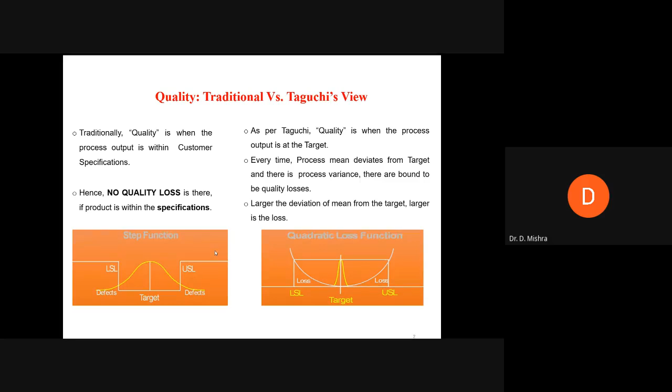Now, according to Taguchi, there is an ideal quality, and that refers to a reference point or a target value for determining the quality level of a product or service. That is the target level, as you have seen in the previous one.

And the ideal quality is delivered if a product or a service performs its intended function throughout its projected life under

reasonable conditions. So we can say this is working within that particular range and for the limit of the period that we have defined.

And this ideal quality is a function of customer perceptions and satisfaction. You know, this perception and satisfaction are both qualitative terms, and these qualitative terms have to be converted

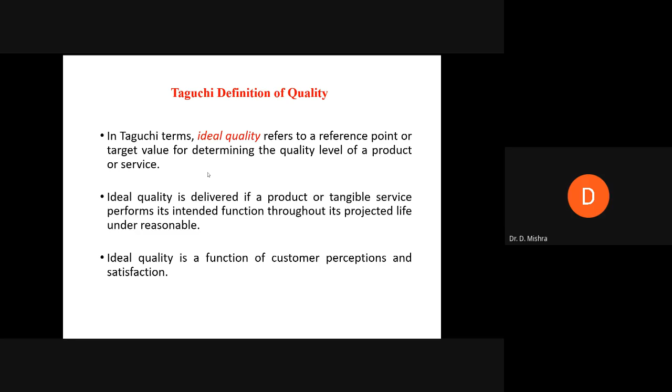to some quantitative term so that you can go for optimization of the parameters. You have to convert it to some quantitative terms. How this is converted, we will see.

Now, as you have understood, quality according to Taguchi is meeting the target, and in any process, in any manufacturing system, either it is a service or a product, there are some inputs, and when this

In any system, there are some noise factors, there are some process issues, there are some mismanagement, maybe human error, maybe the error of the system, maybe error of the workstation. So there is some noise.

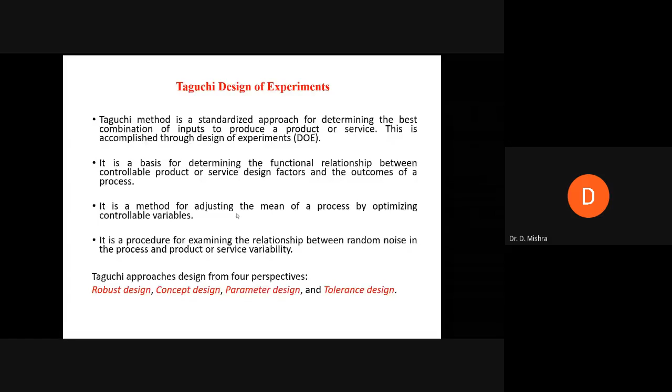This is the approach of the Taguchi design of experiment.

Now, what is the robust design? Robust design means you have to make it defect-free and high quality. And this Taguchi approach for creating robust design is through a three-step method consisting of concept design, parameter design, and tolerance design.

What is the concept design? This is the process of examining the competing technology to produce the desired output. So in the concept stage, you have to go for different concepts, different alternatives, study the alternatives, and ultimately converge on one alternative or one method or one technology so that it can be applied.

That is the concept, and this concept design includes the process technology choices and process design choices - whether the process will be automatic, semi-automatic, or automated, semi-automated, and in the design, whether designing of the layout, design of all other things, human behavior, everything comes under the process and design choices.

So this is the concept design. In one sentence, I can say this is the conceptualization of the product and process, and the design of the product and the process. That is the first one, the concept design.

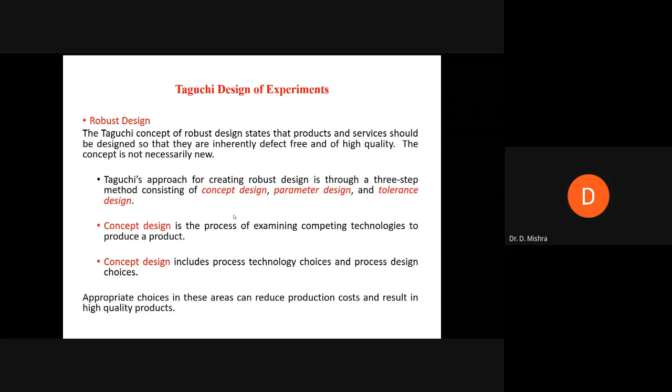Then parameter design - this refers to the selection of the control factors and either the level or the range of each factor that is to be controlled. Basically these are the input parameters which are required to be controlled. And these control factors are those variables in a process that...

Management can manipulate - the input parameters which the management can manipulate, not the user, the management that can manipulate. And control factors do not affect production cost. Cost does not depend upon this. When you say production cost, it is basically the raw material cost and all other costs related to the process.

In terms of time of production, the time of production is converted to cost unit and you find out the cost. So these input parameters do not affect the production cost. The optimal levels are the targets or the measurement of our performance - what is our desired performance, or what are the performance outputs that we require? That is to be defined in the parameter design.

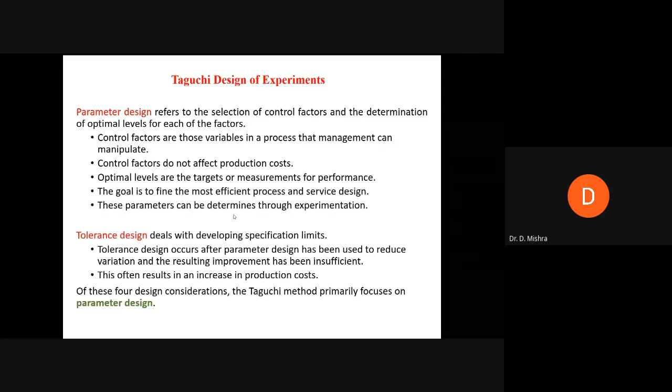So out of these four considerations, the Taguchi method mainly focuses on parameter design. Hence, here also we will study how we can design the parameter with the design of experiment using the philosophy of Taguchi.

Now, when can this Taguchi philosophy or methodology be applied? When you have a large number of factors, you can use the Taguchi methodology, and the time and cost of experimentation has to be reduced. Suppose there are so many factors, and for each individual factor you go for so many experiments, the cost of experimentation will be very high. Hence you have to reduce the number of experiments, and to do that, you adopt the Taguchi philosophy.

And in cases where the number of control factors is more than the number of noise factors, this is applicable because there is a better chance of finding a factor which will help in reducing the noise. And when the product and process under design is extremely critical, and in no condition shall the process deviate from the target, there you have to apply this Taguchi method.

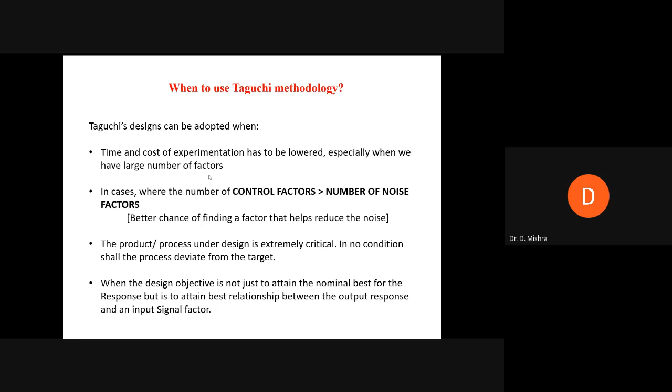And when the design objective is not just to attain the nominal best for the response, but to attain the best relationship between output response and the input signal factor, there you adopt this Taguchi methodology. But most importantly, what is required is that the Taguchi method is applied generally because the main objective, practically, is that we wish to reduce the number of experiments. We need not conduct the complete experiment; the number of experiments is reduced in this case.

And it defines a function called the quality loss function. Now we can look at this diagram. At the middle, this is called a step function, where a target is defined, and here there is an upper specification limit and a lower specification limit.

Suppose one observation, point A, is closer to the upper specification limit without being at the target. This is not at the target, rather it is at some other point nearer to the upper specification limit. What do you understand from this? We understand that this is within control, and this is a good part or a good product or a good process. But still, as this is not meeting the target, it is incurring some loss.

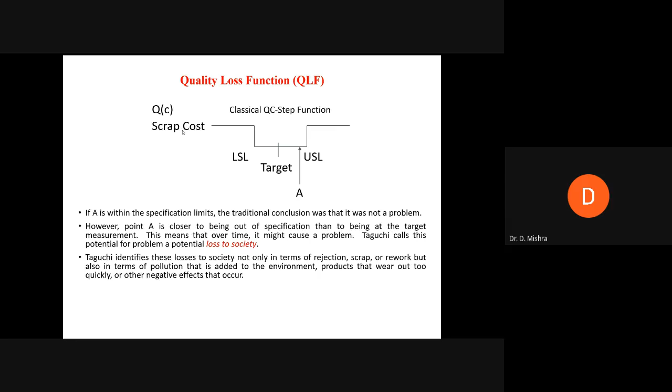That is a potential loss to the society. According to Taguchi, this is the potential loss to the society, because it is not achieving the target, not achieving the exact point. There is still some error, although it is within the control limit. Taguchi identifies these losses to society not only in terms of rejection, scrap or rework, but also in terms of pollution added to the environment, products that wear out too quickly, or other negative effects that occur. For rejection, scrap, rework, or pollution, product wear and tear, all of this costs a lot. Those are the losses, those are the noises. Those are the losses to the society or to the system, and if you can reduce these, it means you are reducing the noise.

The quality loss function focuses on economic and societal penalties incurred as a result of purchasing a non-conforming product. Although this is conforming, if you go for a non-conforming product, you incur a loss. These losses may include maintenance cost, failure cost, ill effects to the environment such as pollution, and excessive cost of operating the product.

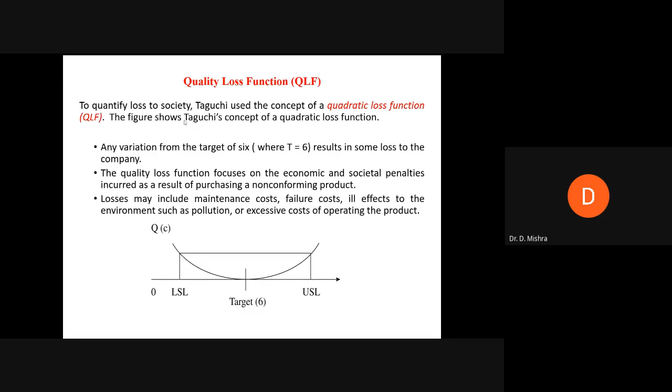This quadratic loss function is defined as: loss y is equal to k into (y minus m) squared. The k is a constant, dependent by A divided by d squared. A is the cost of corrective action, and d is the value of the process deviation. This is the constant k.

This is empirically related. Y minus m: y is the measurement of the unit, and m is the target value - how it deviates from the target value. When this is squared, it becomes positive, giving a quadratic equation, or second degree equation. This is defined as the loss function.

What is the objective of the loss function? The function drives the objective of Taguchi design, which is to design a process that not only complies with customer satisfaction, but is also aligned to the target. According to Taguchi, we are not only achieving customer satisfaction, but also achieving the target, or it is aligned with the target.

Now, based on this philosophy, let's see how this can be applied to a system. There are different signals, and we are getting noise. There is a ratio called the signal to noise ratio. This is a logarithmic function which can also be defined as an inverse of variance.

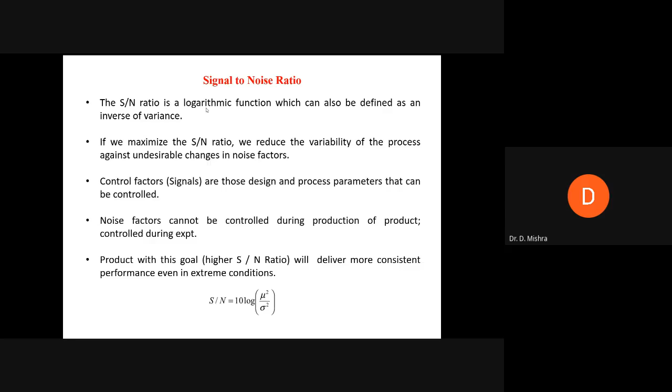So a product with the goal of higher SN ratio will deliver more consistent performance in extreme conditions. So we use the signal to noise ratio. The ultimate aim is to reduce the noise, and hence the signal to noise ratio - the higher value will yield better performance in terms of the output. That should be our ultimate aim.

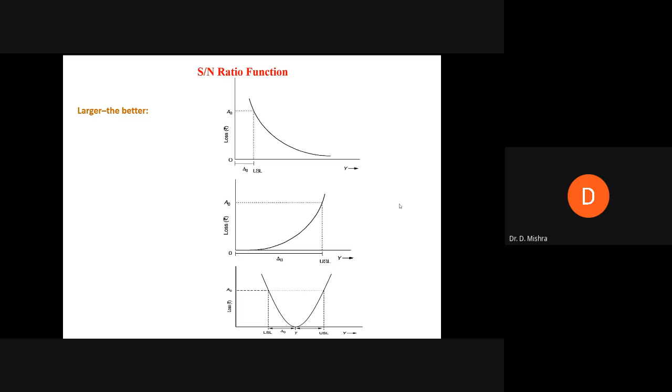You can see there are different functions defined. Generally, three functions are used. The first one is larger the better - for example, you need fuel efficiency, strength, tensile strength, compressive strength, adhesive strength, corrosion resistance. These are required to be higher. So in this case, we define a lower specification limit. Within or below that, these are rejected, and we accept other things above the lower specification limit. This is called the philosophy of larger the better.

This is the equation given by larger the better. Another one is the smaller the better - for example, the wear of an automobile tire, pollution, smaller the better. Defective, smaller the better. Shrinkage, radiation - this is smaller the better. So we go for the smaller the better, and this is the equation of this smaller the better.

You can study the graph. This is the inverse of the first one.

Now, nominal the best — actually, we have to achieve the target within these control limits. This is the basic equation for nominal the best. But while going for this, we have different control factors or input parameters.

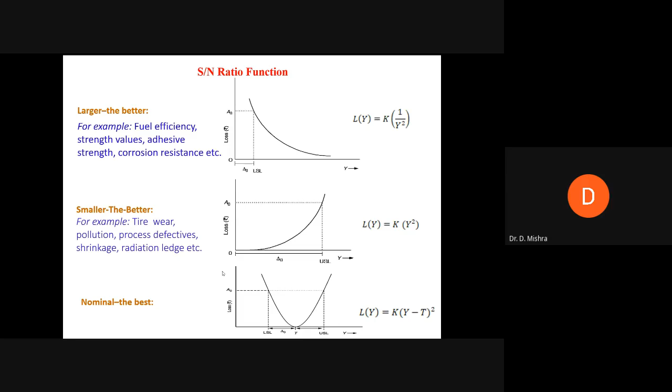Let us suppose for a machining problem, MRR required is high, but the surface requirement is low. So in one case we follow larger is better, that is for MRR, and for surface roughness we need smaller is better. These are the different functions we use while optimizing the process.

Now how do we choose this? Smaller the better minimizes the responses. Larger the better maximizes the response. Nominal the best targets the response, and you base the signal to noise ratio on means and standard deviations, directly achieving the target. So when there is a minimization issue, refer to smaller the better, and when you need to maximize, go for larger the better.

Now, what are the advantages of choosing this? The response varies related to the nominal or target value under different noise conditions, not the control conditions. The validation and prediction of optimum performance signal to noise results are transformed into a logarithmic scale, meaning if there is some non-linearity, this can make the behavior linear. This is the main advantage of using this signal to noise ratio.

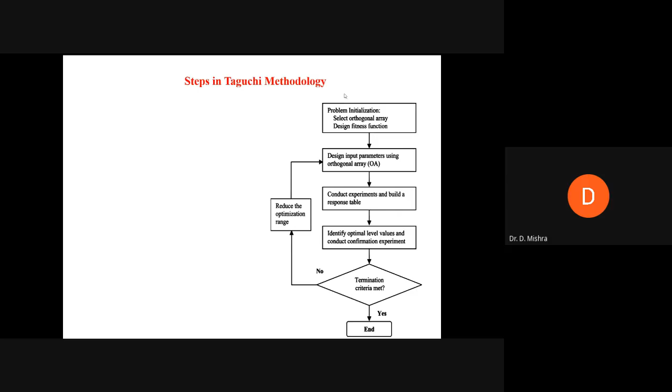Now, different steps of the Taguchi method or methodology, how to optimize the issue. This is the 8-step method. In this 8-step method, the first step is to identify the main function, its effects, side effects, and different failure modes.

Identify the noise factors, testing conditions, and quality characteristic. Identify the objective. Identify the control factors and their levels, the input parameters and their levels. Select a suitable orthogonal array, which we'll see, and construct the matrix.

Now, if you define it in a flowchart: initialize the problem with selection of different parameters, orthogonal array, and the fitness function. Then design the input parameters using the orthogonal array. Conduct the experiment and make a response table. Identify the level of values and conduct confirmation test. Check the termination criteria — if met, stop, otherwise you can redesign, go for optimization, or redesign the orthogonal arrays.

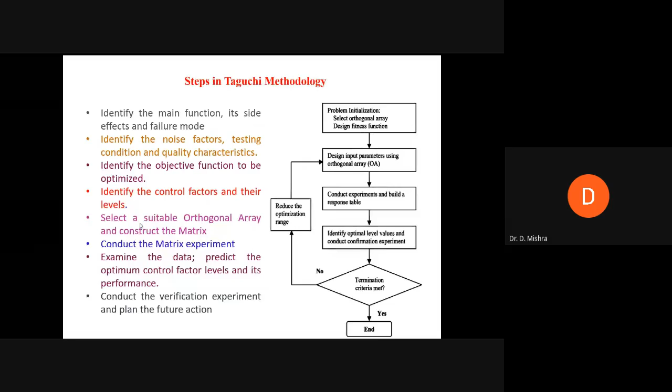Now let us take one example where it is an electrochemical machining process, ECM process. The side effects are material removal rate, surface finish, surface roughness, and radius overcut or ROC. And it lists down all the factors that will affect or influence the machining process.

There are two ways — this is very important. You have to identify or find out what you are going to do, what should be the input parameters, what should be the range or levels of those input parameters, and what are the objectives to be optimized.

You can do this in two ways. One, by a brainstorming session, where you take different ideas and knowledge from various literature, from experienced or skilled operators, and from previous experimentation data. Based on this, you have this session, and if this happens, you have to go for a lot of brainstorming sessions with other people also.

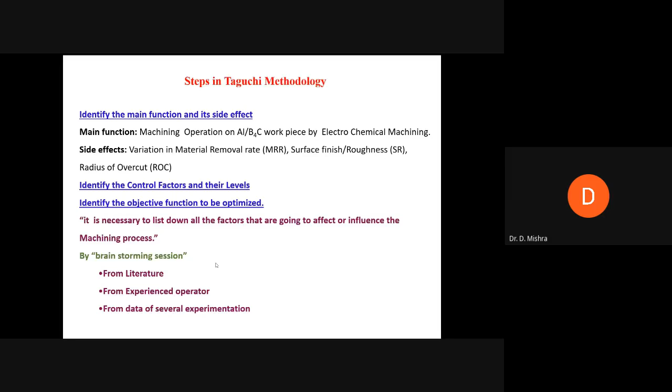You can discuss this and find out what are the objectives and what are the control factors or input parameters. Or you can go through a fishbone diagram.

Out of these many things, you have to study which factor or parameter is affecting most, and also from this you can find out the noise factors which are not under control except during experiments in the laboratories. So either from a brainstorming session, which is a qualitative method, or from the fishbone diagram, which is also qualitative, you can find out the control parameters or input parameters and the response or desired performance required. This you have to find out from these two.

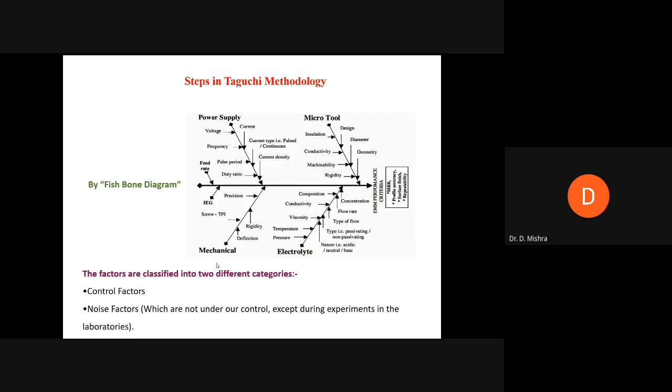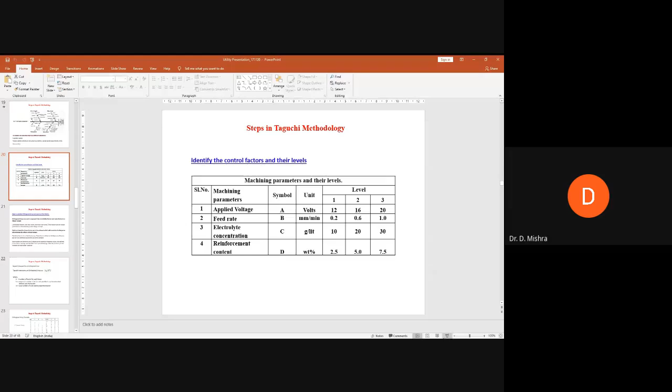So here, for this electrochemical machining, I've taken voltage, feed rate, concentration of the electrolyte, and reinforcement content - A, B, C, D. These are four input parameters, and we have defined the range.

We define the range from 1 to 3, or 3 levels. Voltage is varying from 12 volts to 20 volts, feed rate is from 0.2 to 1, and electrolyte concentration from 10 to 30. Like that, we define the level or range, and within that range we define 3 levels: level 1, level 2, level 3. These are the input parameter settings we define here.

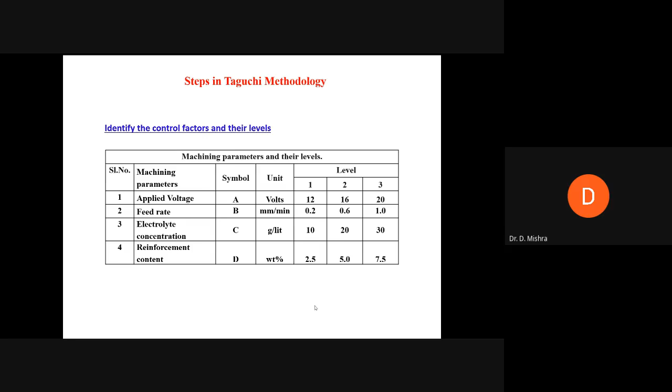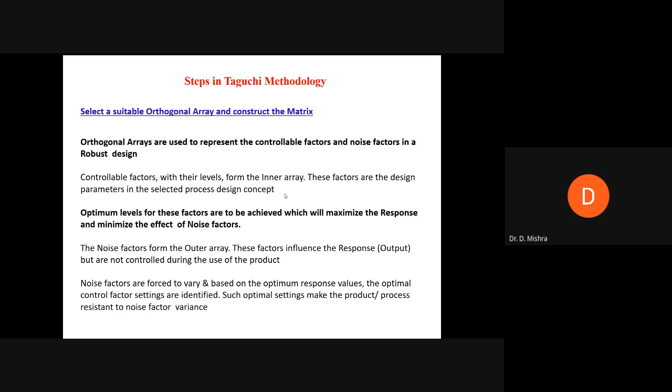And now to choose an orthogonal array - what is the orthogonal array? Orthogonal arrays are used to represent the controllable factors and noise factors in a robust design. Robust design, that is parametric design, is a zero defect design. Optimal levels of these factors are to be achieved, which will maximize the response and minimize the effect of noise factors. This is where we go for orthogonal arrays.

Traditionally, the orthogonal array is given by the expression L N, s to the power k, where s is the number of levels for each factor, k is the maximum number of factors, and n is the number of trials - how many experiments you are conducting. This is the traditional way of representing the orthogonal array.

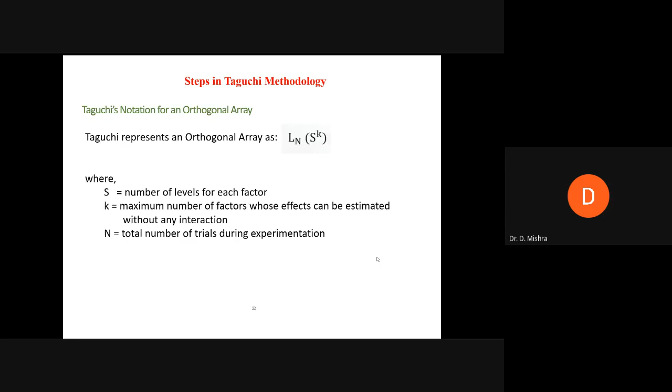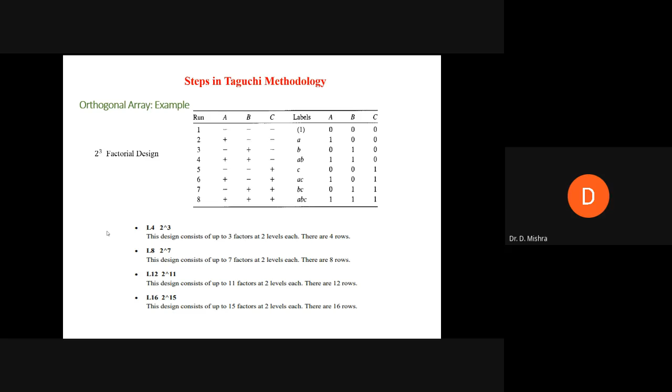There are other tables or orthogonal arrays used for different experimentation. Some arrays are L4, L8. In L4 we have 4 runs, with a maximum of 3 factors considered, and this is based for 2 level. For 3 level we can use L9, L18, L27 - most commonly L9 and L27. L27 gives you 27 experimentation or runs, and L81 gives you 81 runs, which can be either 2 level or 3 level as defined here.

Then you have to select one orthogonal array based on your requirement. So here, because we have got 3 levels, we have chosen the L27 array. We'll see this later.

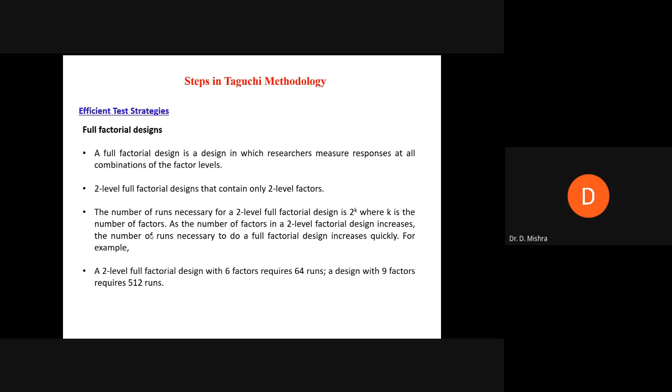And how do you go for the test strategy? Either you go for a full factorial design, or a fractional factorial design. Full factorial means you conduct all the experiments or all combinations. In a 2 level full factorial design, the number of runs necessary is 2 to the power k, where k is the number of factors. This is applicable when the levels or parameters are less - you can go for full factorial design. Otherwise, to reduce the number of experiments, you can adopt the fractional factorial design, going for fewer experimentations.

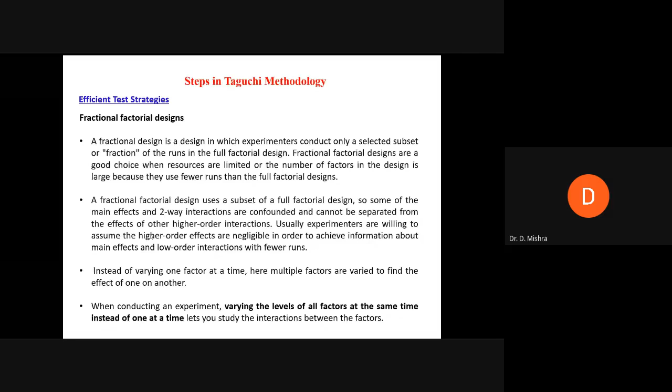Based on this, we have chosen parameters like current, voltage, and concentration, and so on. Our response or output parameters are MRR, surface roughness, and the radial overcut, ROC. Now let's see how we can apply the Taguchi method to this.

Based on this Taguchi method, how can we optimize in a single optimization, and then move on to the multi-objective system? The philosophy or method we are presently discussing is that first we will go for the single objective optimization, then combine this with the utility method, and then go for the multi-objective optimization.

With the help of this Taguchi method, Taguchi design of experiment, we have defined our input parameters and our performance measures. There are 4 input parameters and 3 performance measures, and we can optimize each of these by utilizing one orthogonal array. Now, this is the result we got from the experimentation.

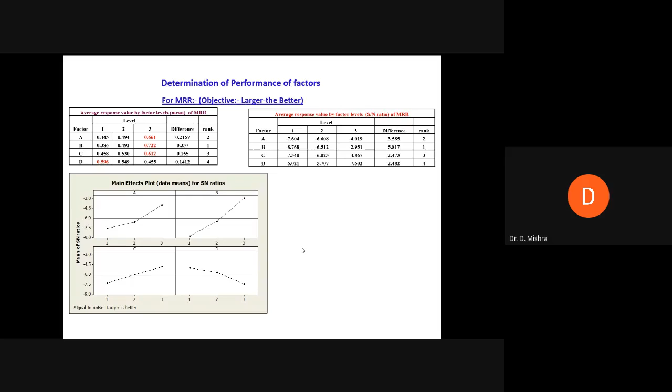We have adopted the L27 orthogonal array, with the objective that larger is better. With the help of the software, you can get this result. Now, what is the optimal parameter setting?

The optimal parameter setting is that A3 is higher, B3 is higher, C3 is higher, and D1 is higher. So we add this, minus 3 times the mean value - we calculate the mean value because there are 3 levels and 3 performance outputs detected.

From this we are getting the optimal MRR as 0.99166. So we have optimized the MRR, or material removal rate, based on the L27 orthogonal array and on the philosophy of larger the better, and from the calculation we arrive at this optimization.

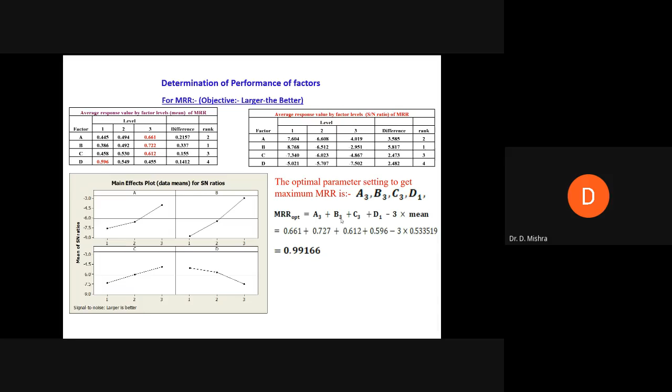But with this setting - A3, B3, C3, D1 - the other objectives may not be achieved. This means we may not be able to minimize the surface roughness, and we may not be able to minimize the overcut. But this parameter level setting is helpful for the material removal rate.

Now for the second one, the surface roughness, we need smaller surface roughness - it should be less. So in this case, it is smaller the better. Hence, we choose based on the parameter level which one is yielding the smallest or minimum value. Here this is minimum, here this is minimum, this is minimum, and this one is minimum.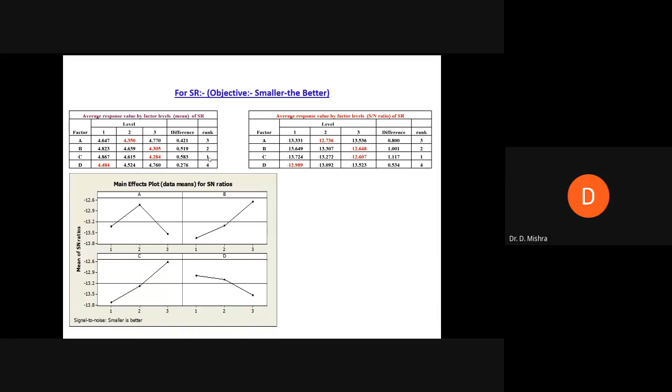And we get this different ranking. Here we can see that the optimum value will be obtained when A is set to level 2, B is set to level 3, C is set to level 3, and D is set to level 1. From the usual calculation, you can get the optimized value.

Now, if you see, the previous setup was different - that was for the MRR, and this one is for the surface roughness. This is different from the previous one. For the same experiment, you can make this, but here what we are doing is getting this optimization as our single objective.

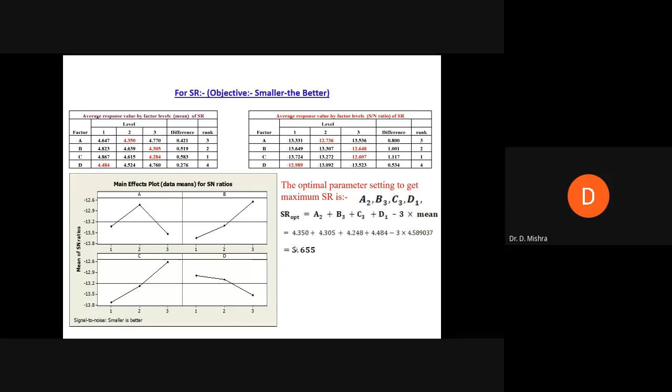In any process, let us say 3 performance parameters are there: MRR, SR, and ROC. If you are focusing on one, then you should adopt the single objective method. You have to go for the single objective. Similarly, you can go for the radial overcut.

In this radial overcut, we have again got a different setting: A is set to level 1, B is set to level 3, C is set to level 1, and D is set to level 3. So in this case, we are getting the optimal setting like this, with the help of this equation, this method. We are getting this one.

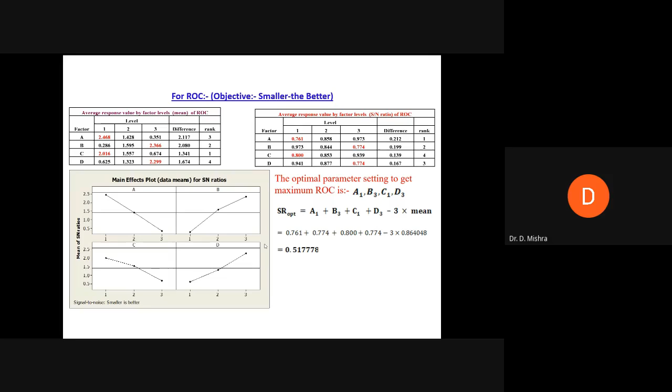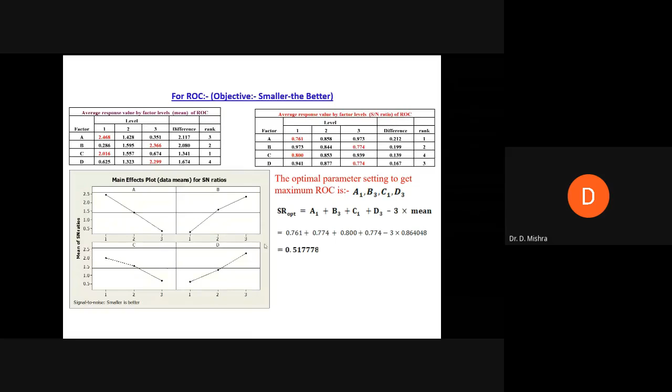So what we got here is that we conducted some experiments based on Taguchi philosophy, adopted one orthogonal array, adopted the policy of either the smaller the better or the larger the better, and we were able to optimize the individual parameters, the individual performance output in terms of the input parameters. But we are not able to find out the overall or the holistic or the total optimization, based on these input parameters, such that simultaneously all the things should be optimized. It means the MRR should be increased, ROC should be reduced, and SR should be reduced. We are not getting that.

When you go for a single modification or augmentation of this method, that is the utility theory. If you go for utility theory based on Taguchi, and if you add Taguchi and utility, then you will get the multi-objective decision.

What is this multi-objective decision, or what is this utility? This utility represents the satisfaction that a consumer receives for choosing and consuming a product, process, or service. For example, you are supposed to purchase a car. The things you consider are fuel efficiency, safety features, riding comfort, space, how much money you have - there are different attributes, and you go for the decision making.

So this is a collective decision - you put several objectives together and get a decision. This is called the utility. It means all these parameters are given some weightage, and you calculate the individual utility, make the system non-dimensional, and add up these utilities so that you get an overall utility, which will simultaneously optimize all the input parameters. This is the objective.

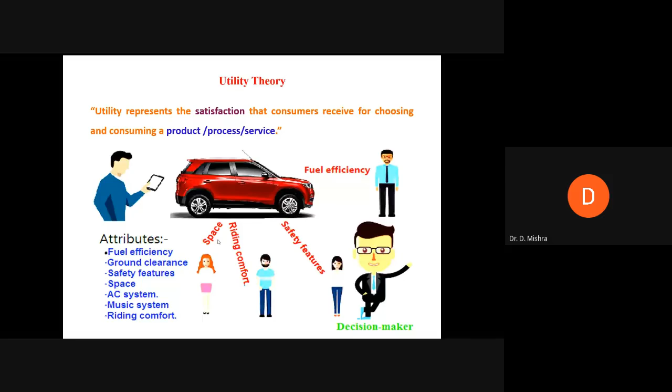So here we are finding out the overall utility - the satisfaction provided by all attributes of the product or process to the decision maker, known as the utility of the product or process. This is the overall utility. But first we find out the individual utility, and then we add up these things with some weightages so that we get the overall utility.

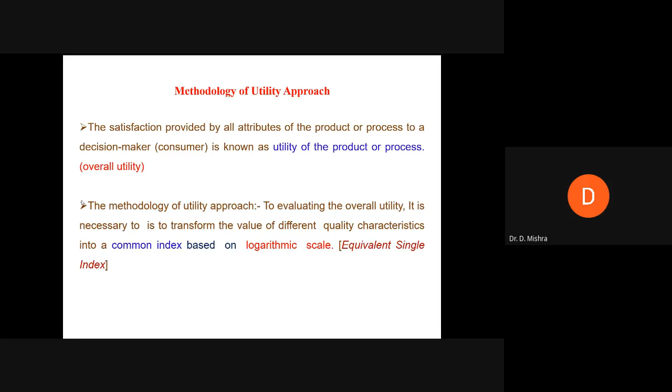And this is on a logarithmic scale, to make it linear. Now, the overall utility of a product or a process can be represented by a unified composite index, which is the sum of individual utilities of various quality characteristics of the product or process. The best choice provides the best satisfaction, which refers to the maximization of the utility.

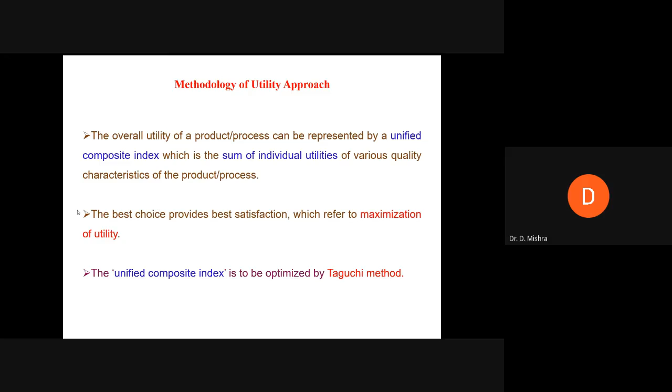After assigning the weights, you calculate the overall utility, and what you get out of multiple responses is a single response - not in terms of any factors or input parameters, but in terms of the utility parameter. Only one parameter, a single response, and that determines the optimal factor levels.

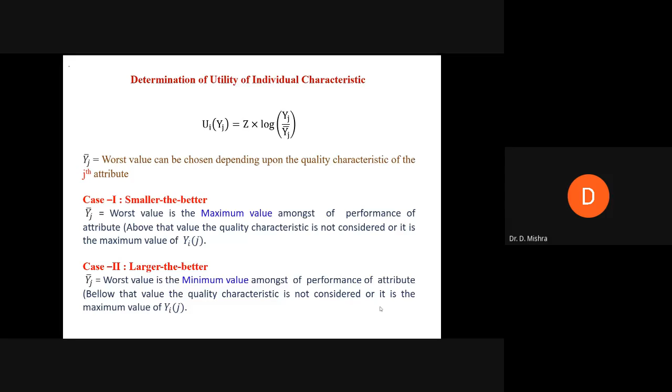Now, how to calculate z? You have to calculate z this way. If you see the previous one, there are two arbitrary values, either 0 or 9. These are assigned to the just-acceptable value, the worst value, and the most acceptable value, the best value.

Suppose in any experimentation, you got MRR as the highest one. So if you put y bar in the numerator, that is the optimized value, the highest value, and that is the most acceptable value. And hence you have to put the number 9 there.

If you see the previous slide, let us see which one - this slide here. If you take it to the other side, then this is yj, a variable you can see. In place of yj, if you put the largest value, that factor will be 9. And if you put the lowest value, that factor will be 0. So if you make it 9 here...

...then the z value will be log of the maximum value by the worst value. By the worst value, you can find out the z value. How this is found out, you see.

Evaluation of this constant: if you refer to the table, the value of MRR is 0.2 gram per minute, that's the minimum value, since all MRR values are greater than 0.2. And the maximum value is 0.99166, so that's the most acceptable value.

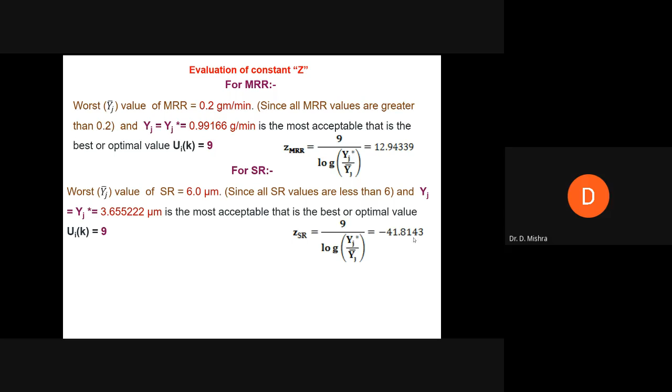Then you've got what is that - 6 here. Log of that one, 9 divided by this, you will get -41.8143 like this. This is the Z value for SR.

Similarly, for ROC we can calculate the Z value. The objective of the Z value is to evaluate the constant Z in order to find out the individual utility factor or utility index. This Z value we find out by considering the highest value and the lowest value, putting a log to this one, and the most acceptable value is given a weightage of 9. This gives us the Z values for different performances or responses - MRR, SR, and ROC. We are working on the performance or the responses now.

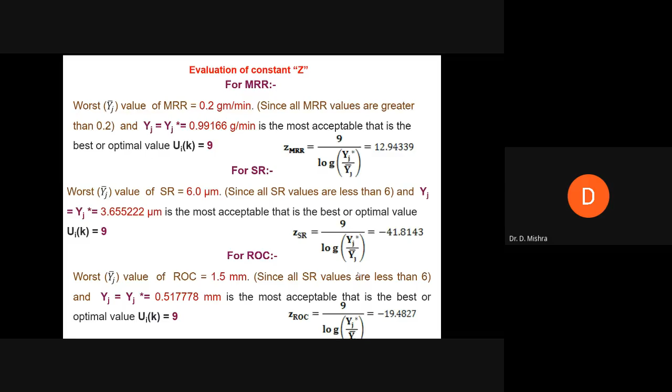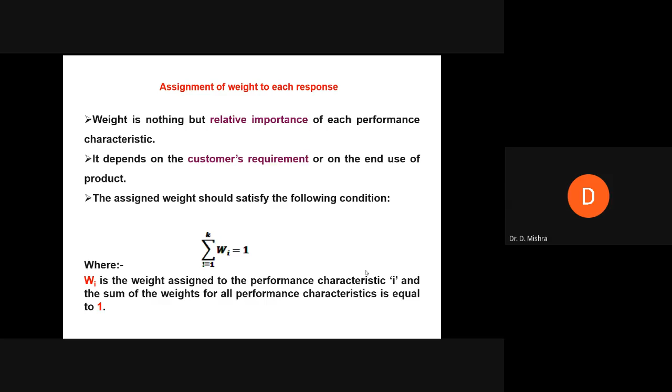Now, this is the weightage given to this. All these, there are 3 responses. Sum of these responses should be 1. And overall, we get these responses as 1 by 3, 1 by 3, and 1 by 3 to all the responses. And this the overall utility is calculated.

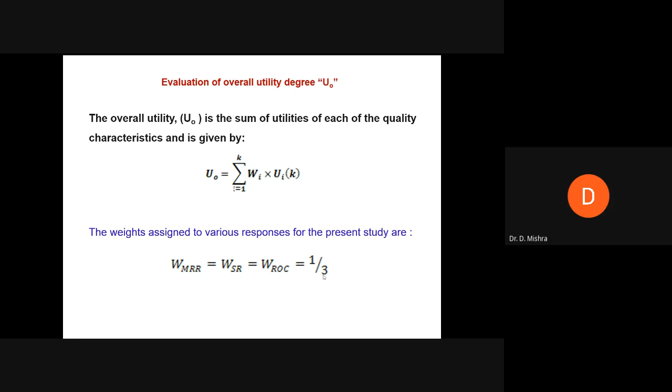Overall utility is calculated according to sum of I equal to 1 to k. There are three, that is W1, W2, W3, like that. The weightages are given to that one. All equal weightages. It is free to the user that you can give different weightages to different responses depending upon your experience and depending upon your analysis.

And this is what you get for different factors. Based on that formula, we calculated Y for MRR, Y for SR, and Y for ROC, and then finally we got the overall utility. And you can see that in experimentation number 18, having a parameter setting of A2, B3, C3, and D1, we are getting the maximum overall utility of 7.069. That is the optimum utility we are getting there.

So after calculation of this, what should we say? We have conducted 27 experiments. In some experiment, by some parameter setting, we got the maximum MRR, minimum SR, and minimum ROC. But here, by calculating the utility of individual responses and combining them together to get the overall utility factor or overall index, we found that experimentation number 18 gives the maximum overall utility in the parameter setting we provided.

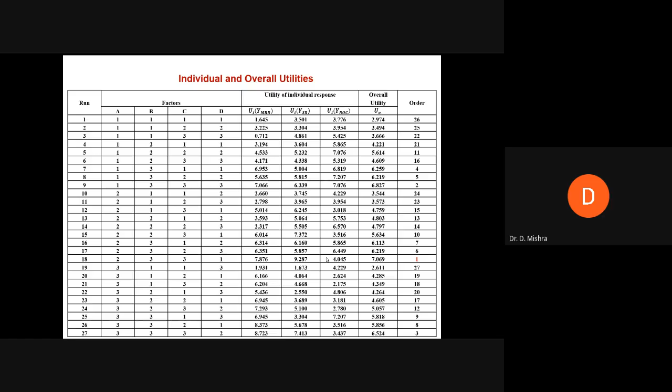Earlier when you considered it as a single objective problem. But however, if you adopt this, you will get simultaneously all the parameters optimized. This is how we get the utility into picture.

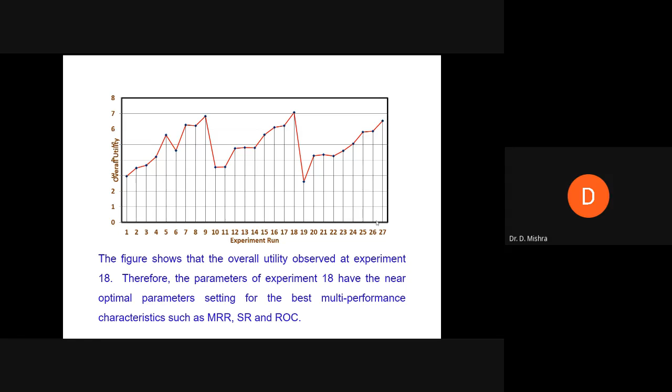You can see this one, that at number 18 here, this is the peak, this is having the maximum value. This is simply a plot of the 27 experiments, and you get the peak over here.

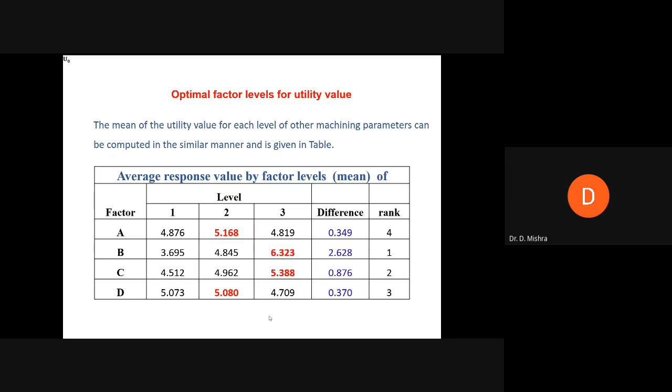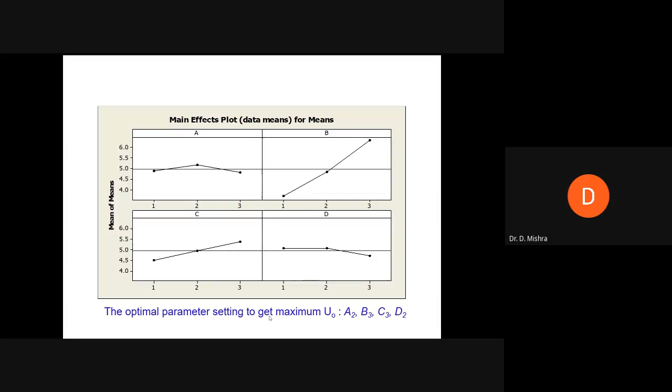So what we conclude is that the utility-based Taguchi method is effective for evaluating the optimal parameter setting. By using a Taguchi method with utility, we are converting it into a single-objective optimization scenario. This approach is efficient enough to solve a multi-response optimization problem.

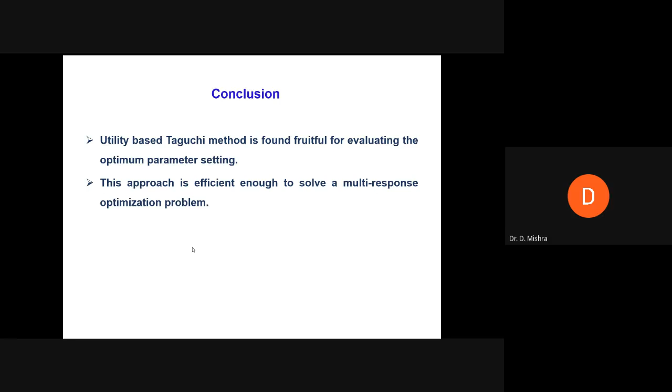Confirmatory test has validated that the parameter setting determined by the utility Taguchi method is correct. This validation is done. And then this can be used for continuous quality improvement and offline quality control.